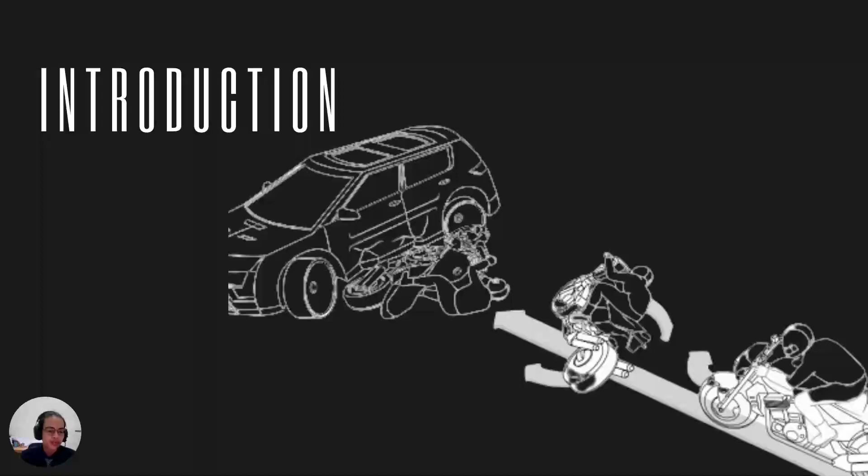First of all, the introduction shows the problem statement, research objective, and scope of research.

First, we go to the problem statement. The problem statement for this project is: what is the improvement that can be made to the conventional brake, and how to design the most reliable and safest brake system in underbone motorcycles. Lastly, can this brake system be modified in underbone motorcycles.

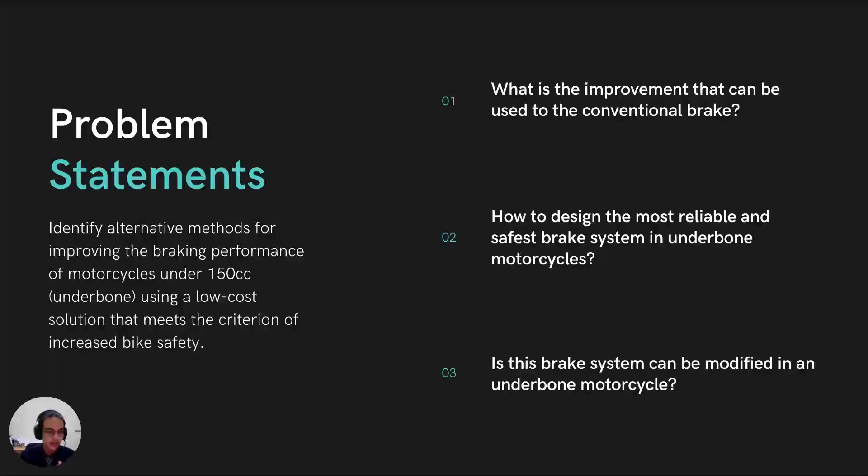Now we go to the research objectives. Firstly, to conduct research into the development of a more effective brake system for underbone motorcycles using a combined front and rear brake system. Then, to develop a combined brake system for underbone motorcycles. Lastly, to measure and evaluate the stopping distance during braking in any road condition, such as wet or dry condition, or on asphalt or cement, and others.

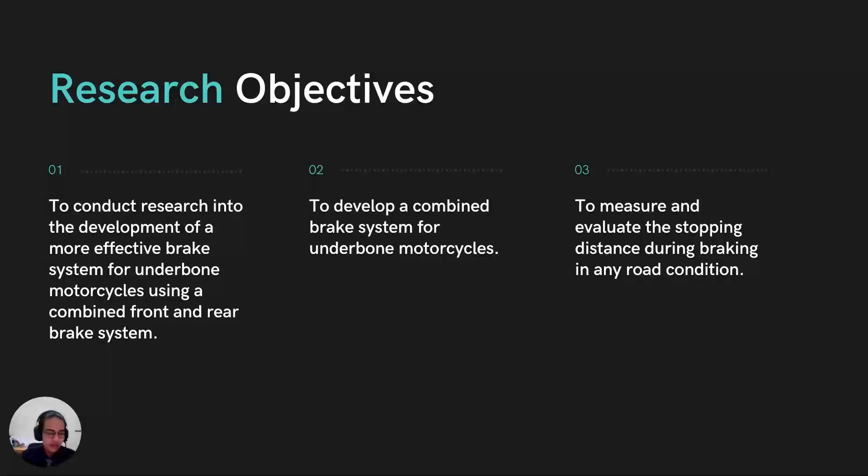This slide shows my scope of research. Firstly, I conduct a survey to ascertain the most frequently used brakes by motorcycle riders and develop a design concept for motorcycle brakes under 150cc. Next, I conduct an analysis of the conventional braking system using CATIA software, then develop a new brake system on an actual underbone motorcycle by fabricating and modifying it. Lastly, I will test and research the new combined brake system performance compared to the conventional brake.

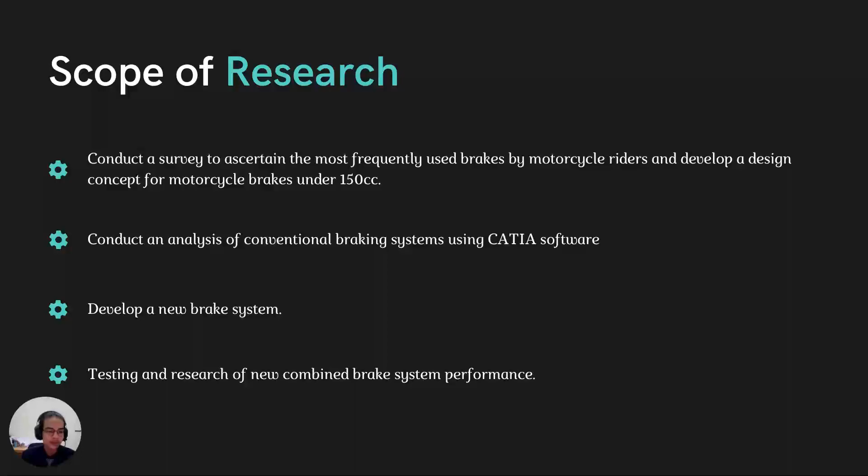Next, I want to go through the literature review. In my literature review, I will explain the statistics of accidents in Malaysia.

The figure in the slide shows the general road accident statistics in Malaysia from 1997 to 2017. As we can see, road fatalities and injuries are becoming a growing concern in Malaysia, with over 6,000 persons killed and over 25,000 wounded annually over the last 5 years. Road deaths have climbed at a constant pace of 4 to 5% per year for the last 7 years, reaching 6,745 in 2009, causing an average death rate per 100,000 people.

For this statistic, the figure on the left shows the statistic of death by road user category over 10 years, and the figure on the right shows the number of registered vehicles in 2017 and several months in 2019. As we can see, motorcycle accidents average 4,100 per year over 10 years, and the total deaths from motorcycle accidents reached 43,031 in 10 years. Therefore, motorcycle users have the highest number of accidents compared to other categories. Meanwhile, the number of cars and motorcycles registered in Malaysia is almost the same. This means motorcyclists are more exposed to death in accidents compared to car users.

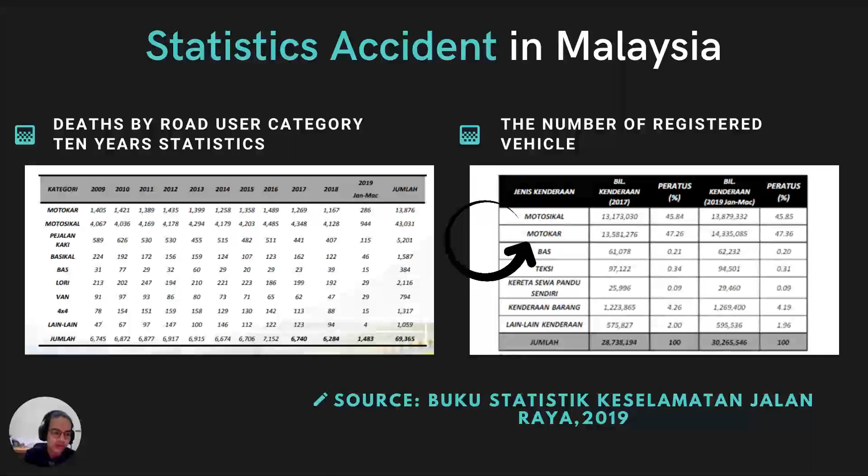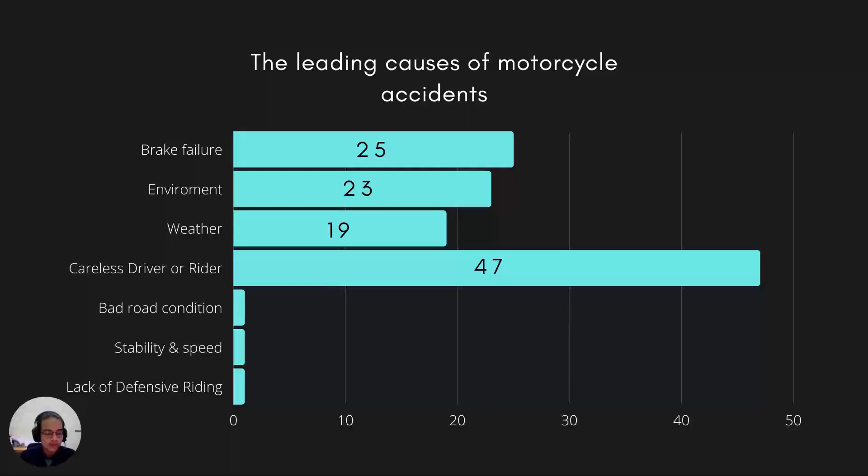Okay, we just go through the bar chart. This is leading causes of motorcycle accidents. What I can conclude here is the main factor of accidents is careless drivers and riders. Brake failure is also one of the leading causes that might happen, because the total number for careless driver or rider reaches 47 and brake failure reaches 25.

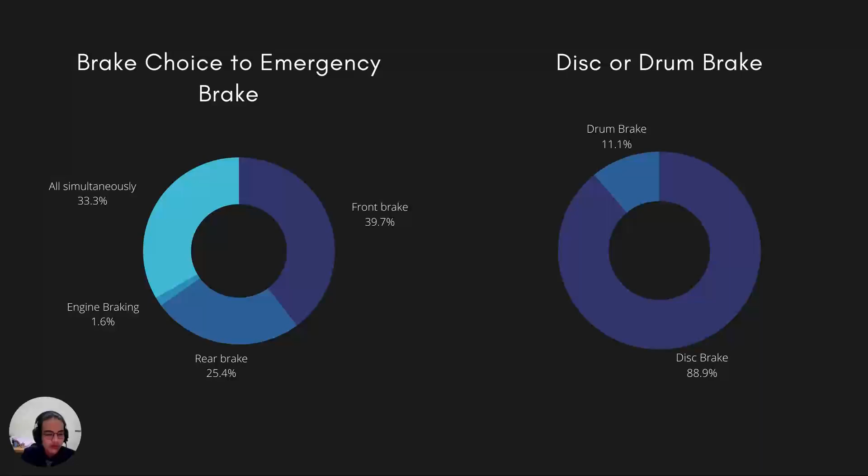Okay, for this survey, what I can conclude here is most respondents prefer to use the front brake as their emergency brake. Respondents also choose this brake for getting better braking performance. Next is the pie chart that shows the brake combination preferred by respondents. As we can see, most respondents choose front and rear disc brake. So this survey can be related to the previous questionnaire where I asked whether disc brake or drum brake is better.

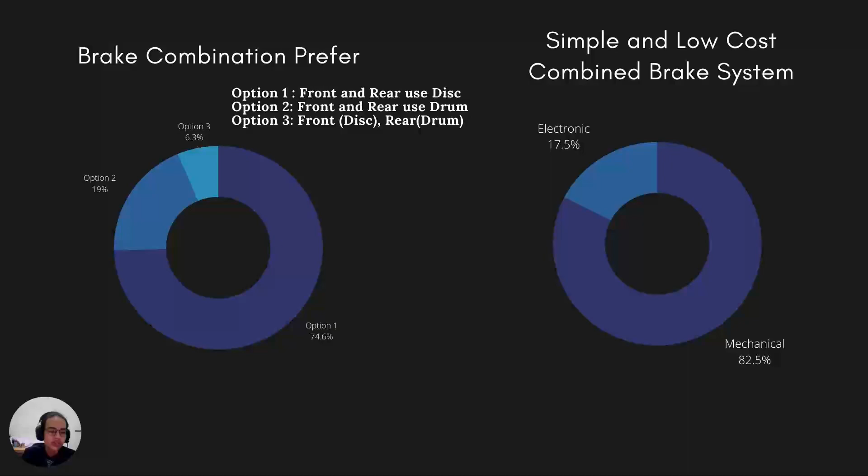Next is a pie chart of respondent answers for a simple and low cost combined brake system. As we can see, 82.5% of respondents assume that installing a mechanical combination braking system in an underbone motorcycle is easy, simple, and low cost. Meanwhile, the electronic combination brake system received only 17.5% of respondent votes.

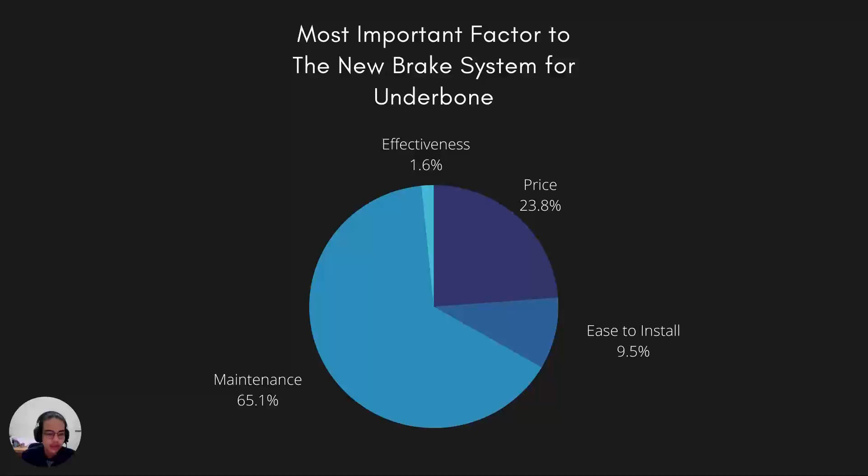Okay, this last pie chart shows the respondent answers for the most important factor in developing a brake combination. As we can see, 65.1% of respondents prefer maintenance. This implies that most respondents put a priority on maintenance, as many people nowadays like to properly maintain their vehicles. Additionally, the pie chart indicates that 23.8% of respondents believe that cost is a major factor in developing a combination braking system for an underbone motorbike.

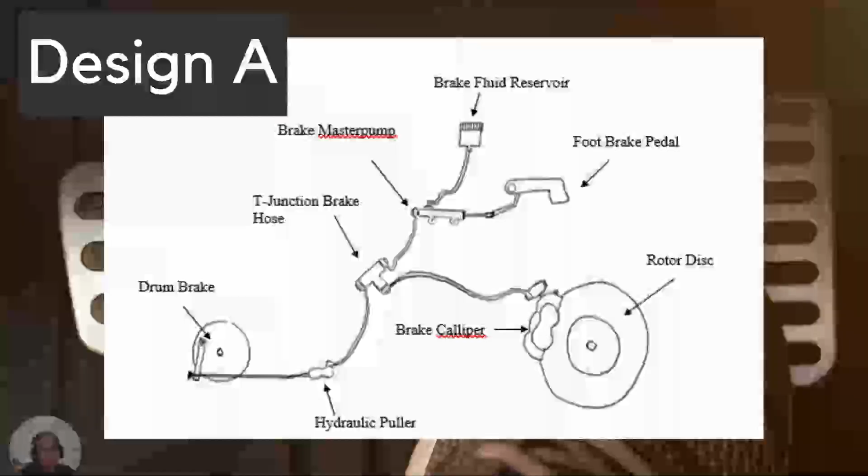Okay, we go to the concept design development. This is my design A. Design A is a combination brake system using a front disc brake and rear drum brake. When the foot pedal is pushed hard downward, the master pump will transfer the brake fluid to the T-junction to equally transfer the brake fluid to the rear and front brake. Commonly, drum brakes use a wired system to pull the cable for braking, but this system must use a hydraulic system to pull the caliper outward using a hydraulic puller.

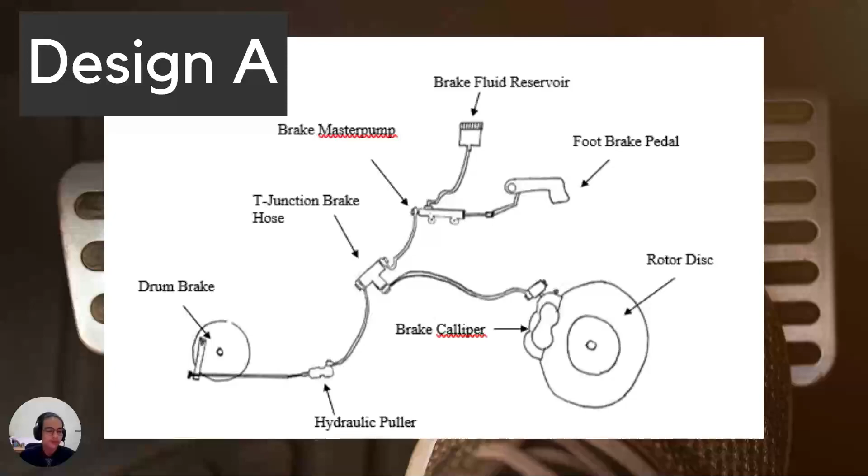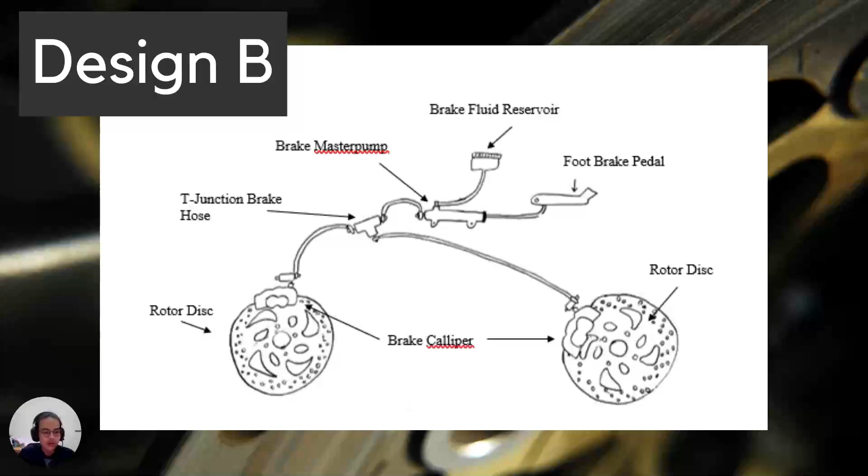And then design B is a combination brake system almost the same as design A, and the system operation is almost the same, but design B doesn't need the hydraulic puller because design B uses both disc brakes, and as we know this brake uses a hydraulic system to operate.

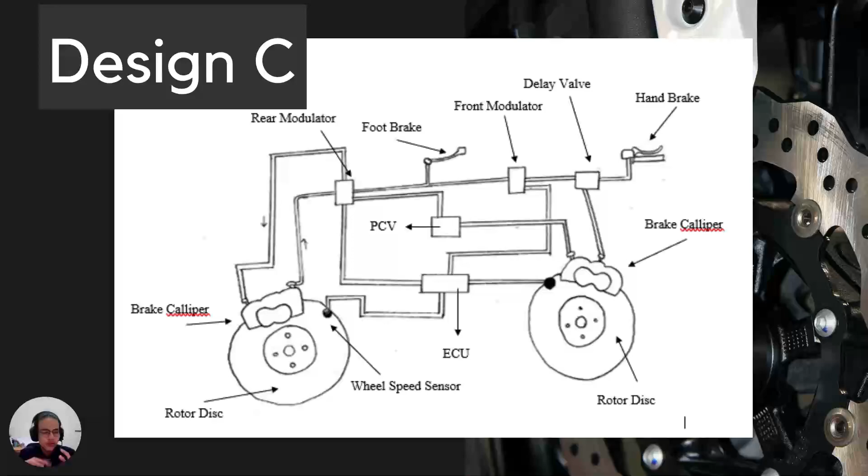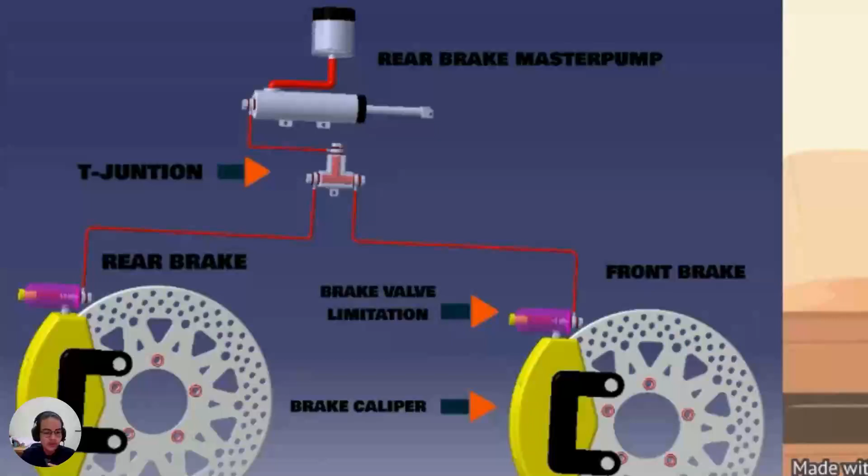Okay, this is my preliminary result that I show in the animation video. This is my project design idea that I will fabricate on an actual underbone. Front and rear brake calipers can be combined by using a T-junction brake hose. Then there will be a brake valve limitation to get the best braking ratio. The T-junction can be located near the rear master pump, and a bracket for the T-junction or any other modification will be needed to finish this project.

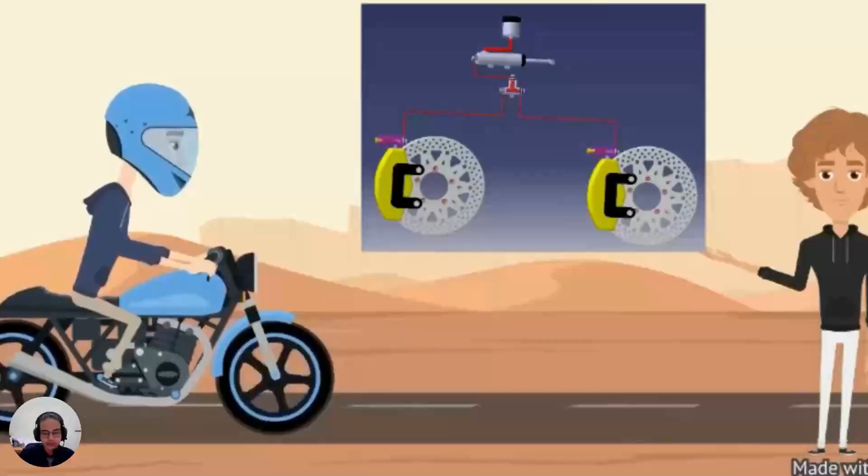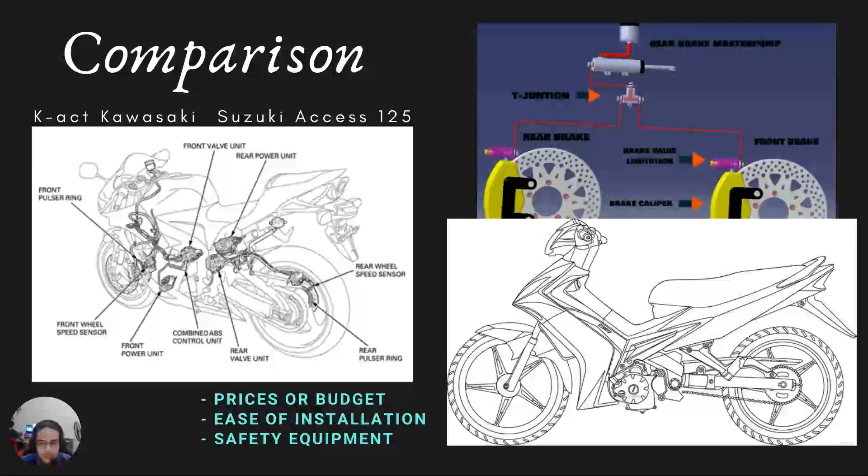In addition, the budget for this combined brake system is very high for the other manufacturers, but for my combined brake system, the budget is very low to make sure motorcyclists are able to install it. Next, other combined brake systems are very hard to install because there are a bunch of electronic systems needed to operate them. My brake system is all mechanical, which is why my system is easy to install. Furthermore, superbikes need more safety equipment because the bike can reach up to 299 km per hour, but an underbone only reaches around 100 to 150 km per hour. That's why the combined brake system Kawasaki has created is very sophisticated and high cost. Okay, that's all from me.